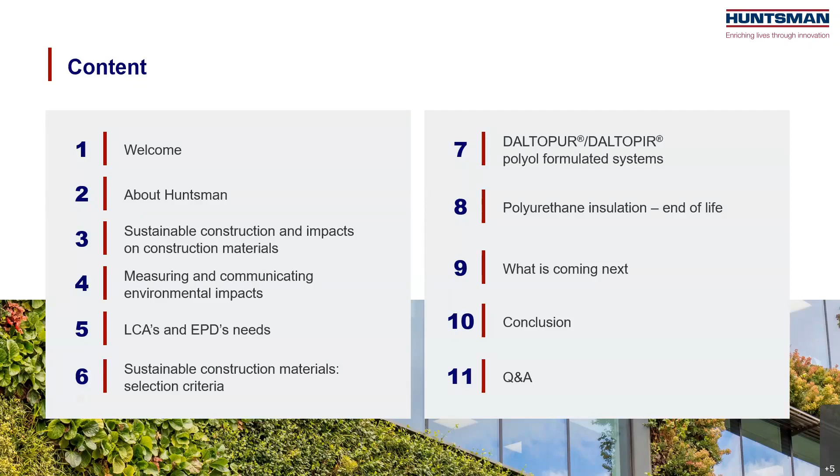So let's start with a brief introduction to Huntsman. Huntsman is an American company founded by Mr. John Huntsman about 50 years ago. Today, Huntsman Corporation is a publicly traded global manufacturer and marketer of differentiated and specialty chemicals. Our products number in thousands and are sold worldwide to manufacturers serving a broad and diverse range of consumer and industrial end markets.

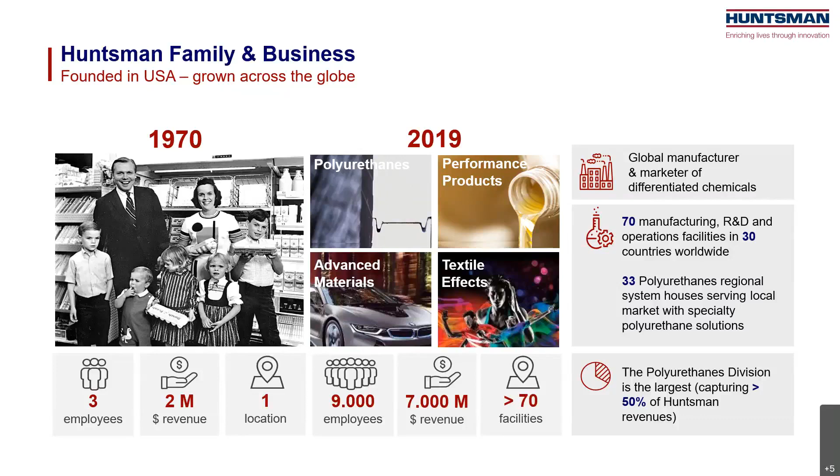ICI Polyurethane, later acquired by Huntsman, was one of the first companies to introduce the technology used to produce rigid foam more than 60 years ago. We pioneered further with the right innovative blowing agents, and the first continuous system production was implemented. In 2010, we enforced the Huntsman Sustainability Council and produced our first final annual report. In 2013, we acquired Oxid LP manufacturer, a US-based producer of proprietary bio-based and recycle-based polyols. Huntsman continued to further develop the rigid continuous business with the years, both in fire process and quality excellence.

Finally, in 2020, we started to introduce polyols with a circular content in new developments in Europe.

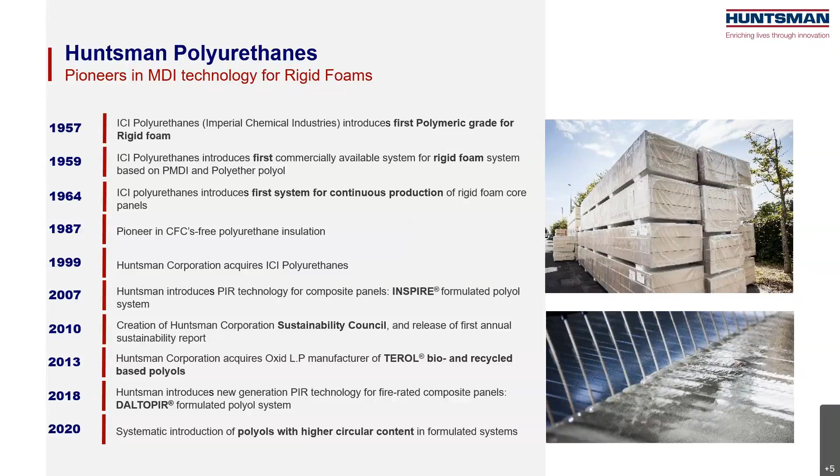The objective of our webinar today is to provide you with clear information on the sustainability construction trend and how we can support your growth in this complex environment. Sustainable construction is a fairly complex matter. With this webinar, we will give you some theory and key principles and tools used.

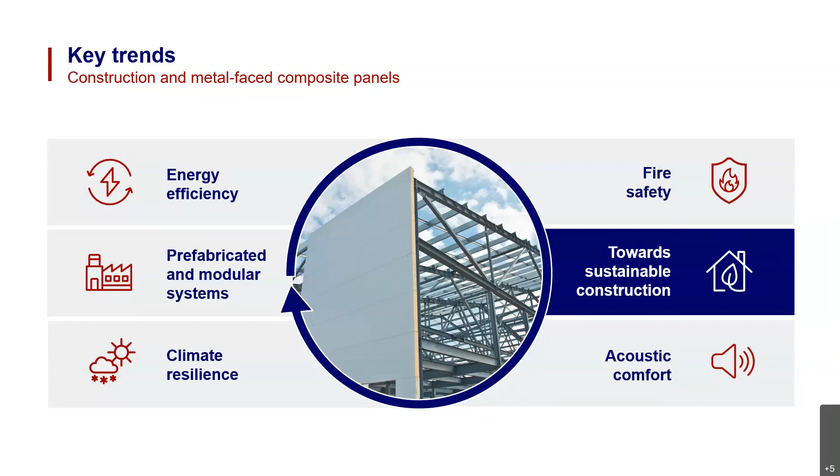In a previous webinar, we focused on energy efficiency and fire safety. This time, we will focus on a trend of increasing importance, sustainable construction.

The building sector has a great impact on the three pillars of sustainability. From an environmental perspective, construction represents 50% of the raw materials extracted and represents 40% of the energy used and the greenhouse gas emitted. With people spending 90% of their time indoors, it is important to build comfortable spaces, but also affordable ones. The construction sector is also a key driver of our economy.

Today, we will focus more specifically on the environmental pillar. What are the tools we can use to reduce the environmental impact and how polyurethane insulation is contributing.

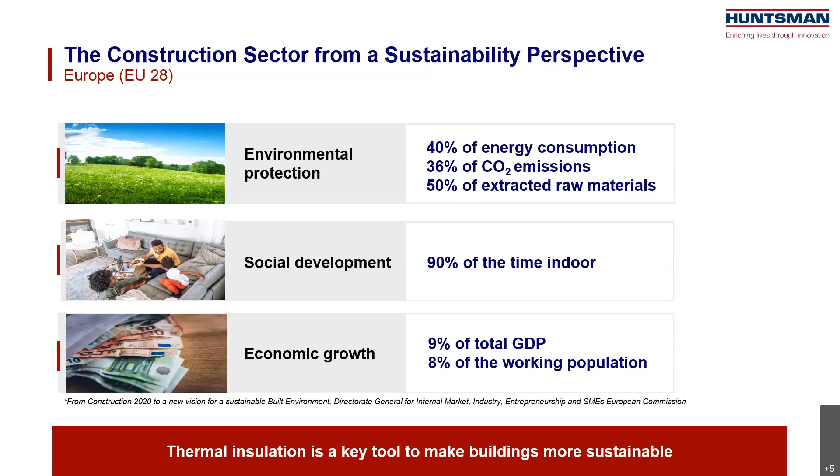With its impact on both energy consumption and CO2 emission, energy efficiency of buildings is a key milestone towards sustainable construction. We are not going to go too much into the details of the energy efficiency trend, as this was covered, as mentioned by Christophe, in more detail in a previous webinar, still accessible on our website. But let's review some of the key aspects anyway.

The whole trend started after the signature in 1997 of the Kyoto Protocol, aimed at reducing the amount of greenhouse gases emitted by human activities.

In 2002, the European Union implemented its first version of the Energy Performance Building Directive. It introduced the obligation of providing a building energy performance certificate, and the obligation for member states to impose a minimum energy performance. This directive, revised already three times, introduced very key concepts: the nearly zero energy building concept, which requires member states to define the most optimal thermal performance per climate and region, and also the obligation for all new buildings to be nearly zero energy since the beginning of this year.

With the Paris Agreement on climate change in 2015, further efforts to reduce CO2 emissions were required. As a response, with the European New Green Deal, whose ambition is for the EU to become carbon neutral by 2050, the European Union has launched a series of initiatives such as the Renovation Wave that will double the initial thermal renovation target, accompanied by adequate funding and promotion mechanisms.

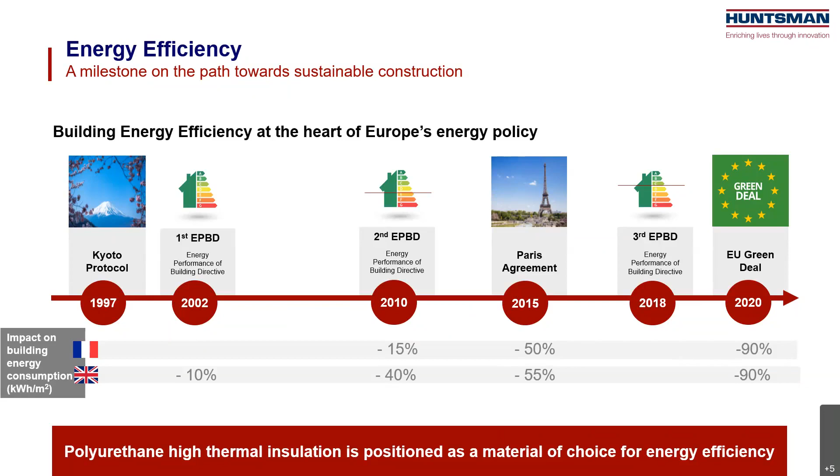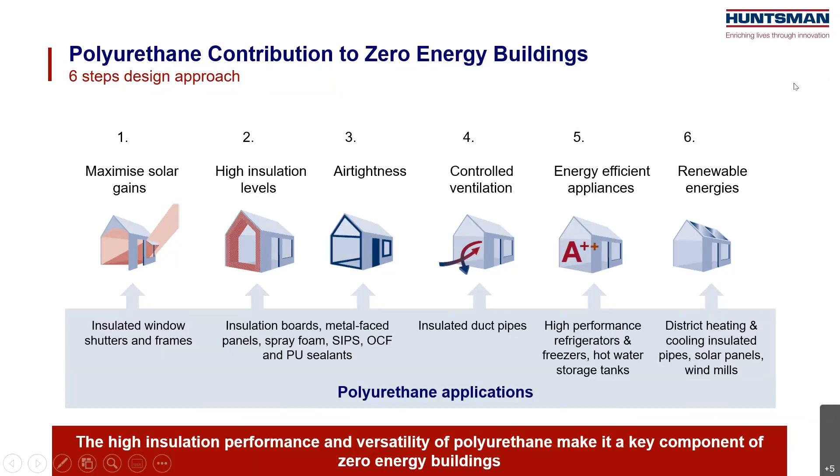Okay, thank you, Christophe. Time to get back to our presentation. As we are moving toward a drastic reduction of the building energy demand, we also start to realize how important the impact of the building material has become.

This trend is the reason why today construction material producers are pressured to provide more information on the environmental impact of their product, and why key policymakers are pushing for transformation of the whole sector by setting new policies, new standards, and incentives. These are aspects we are going to explore further today.

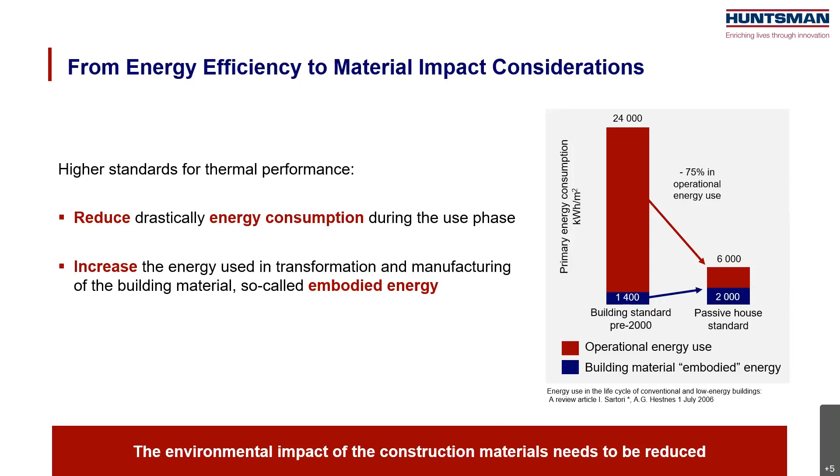But before looking at how we can reduce the contribution of building materials on the overall building environmental performance, we need to better understand how environmental performance is measured and communicated. First, let's see how the environmental impact is measured. To do so, we use a methodology called life cycle assessment, also referred to as LCA.

It is a science-based assessment that considers the environmental impact along the product life cycle, from the extraction of the raw material, their transformation, the various manufacturing processes, the transport, the use, and disposal. An LCA will give us a so-called environmental profile that will show how the product manufacturing, use, and disposal will impact different environmental compartments, such as global warming or acidification, or many others, with some examples in this slide. LCA studies provide information about the benefits and drawbacks associated with the product once decided to use.

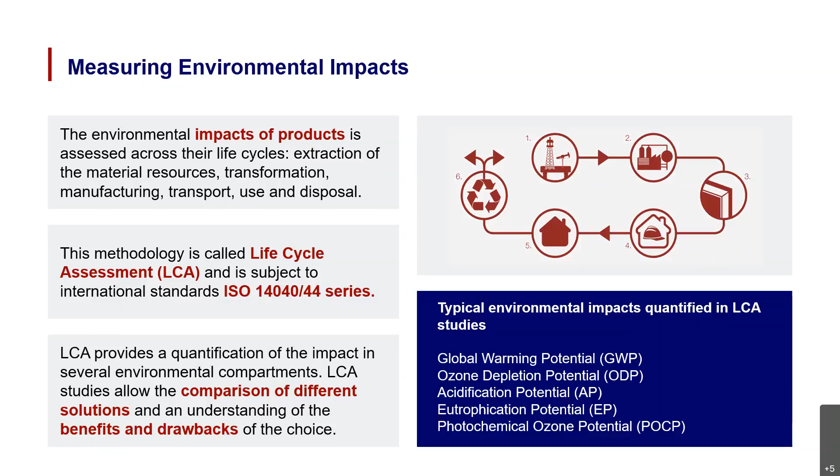When it comes to assessing the environmental impact of construction materials, the LCA International Standards make it very clear that the end-use application and all the relevant ancillaries required for the proper installation and functioning of the building element need to be considered. In the next two slides, we will show the results of two LCA studies that illustrate how PU insulation performs versus alternative insulants in specific end-use applications.

These studies were commissioned by PU Europe, the European Federation of Polyurethane Insulation Producers, and were carried out by third parties. We will show LCA graphs that may seem complex, but I will explain how to interpret them as we go along.

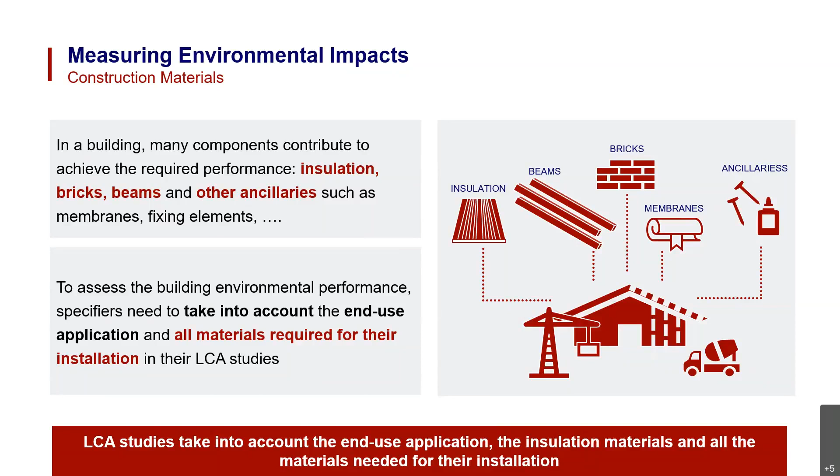In this first example, the LCA study calculated the environmental impact associated with designing a two-story single-family residential house with the same thermal performance for the envelope and the same constructed gross surface areas.

Thanks to the reduced building element thickness and reduced ancillaries for the installation of the thinner PU boards, it resulted, as shown in the graph, that compared to the alternative, stone wool insulation, both building designs have similar environmental profiles. Indeed, from an LCA perspective, differences lower than 20% are not considered significant, and that is what the green shade shows us.

During the study, we also looked at quantifying the living space area saved and found that for such a small dwelling, at least 4 square meters of valuable living space, the size of a small shower room, could be saved by using thin PU insulation layers in the building envelope. This was believed to also improve the property's rent or sales value.

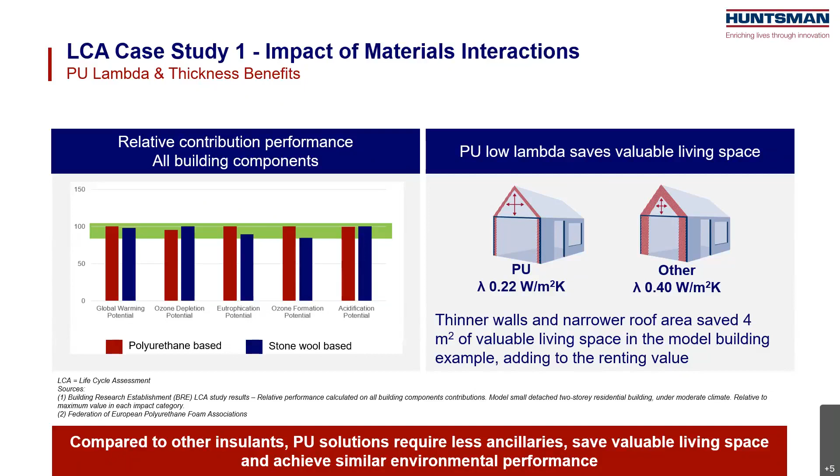In the second example, the LCA study focused on the design of a commercial building with a steel deck roof and metal-faced insulated panels in the walls. LCA showed that in most impact categories, PU performed similarly to stone wool, except that for global warming and acidification, PU performed better.

The study demonstrated that the use of PU, with its low density, translates into a much lighter roof design that required less metal support, which compensates for the intrinsic higher embedded impact of a complex material such as polyurethane. These are just two case studies, and we know that they cannot be extrapolated to all construction detailing and solutions.

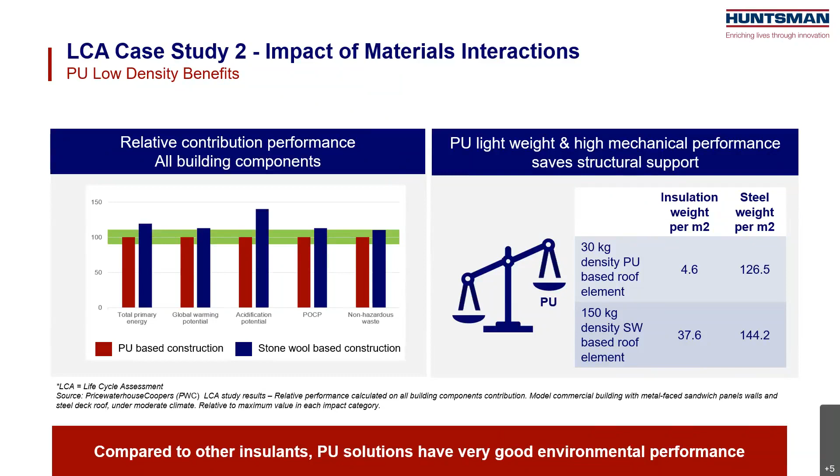What we wanted to show here is that polyurethane insulation can provide buildings with very good environmental performance, as well as very high energy efficiency.

In order to simplify the calculation of the environmental impacts of buildings and to encourage the demand of construction products that cause less stress to the environment, the construction sector has seen the development since the late 90s of what we call Environmental Product Declarations, or EPDs.

EPDs are based on LCA studies. They are third-party verified and are now based on internationally agreed standards, which define the LCA rules to follow, what we call the product category rules.

In Europe, we have two important standards to consider. EN 15804, Amendment 2, is the standard applicable to all construction materials. Based on this document, CEN/TC 88, which is the standardization committee responsible for insulation products under the construction product regulation, has developed the standard EN 16973, which is applicable to all insulation materials.

This standard is currently being updated to reflect the changes of the amendments. There are also a series of national EPD schemes that were developed prior to the European harmonization activity, and which are still very much in use today.

Most of them have aligned themselves to the European norm, although systems like those in France, Belgium, and the Netherlands impose some additional country-specific rules. Huntsman has been very active in the European standardization process and can provide you with more detailed information on the procedures to follow to do the LCAs to establish the EPDs.

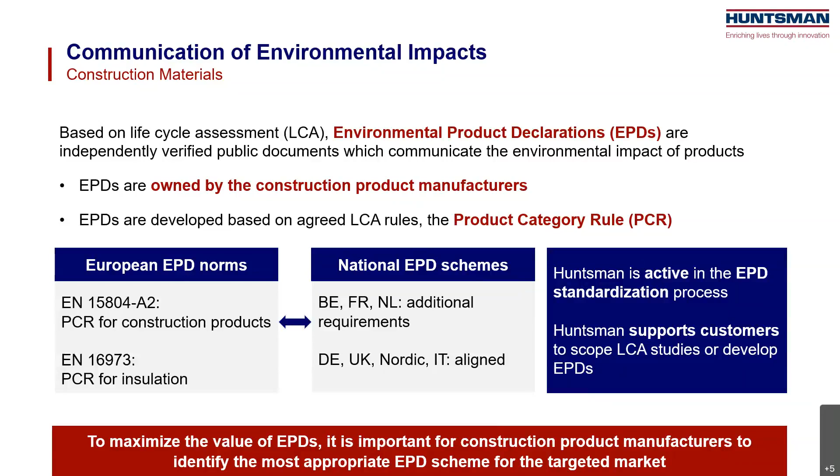Today, the use of LCA and EPDs in construction is driven by both regulatory and market incentives. For example, in the Netherlands, LCA EPD data need to be provided by the construction material producer so that the building's environmental performance can be measured and reported. Failing to do so, overestimated default values will be used that may result in disqualifying the product in the construction project.

In Italy, and soon in Sweden, green public procurement also requires EPDs of materials. In France and Belgium, when a producer wishes to make an environmental declaration in his advertisement, he also needs to provide an EPD as a supportive document.

Next to the legal obligation, there are also a series of market-driven incentives to provide EPDs. This is the case for all green building certification schemes, such as BREEAM from the UK, LEED from the US, DGNB in Germany, HQE in France, or TOTEM in Belgium, to mention only but a few.

These certification schemes are getting so popular that architects and project owners see them adding value to the property for sales. In addition, providing upfront EPDs is seen as showing the company's commitment to contribute to better environments and renders their product more attractive to potential buyers and specifiers.

EPDs can also help producers themselves optimize the environmental performance of their product offering by allowing them to make the right choices for raw materials and optimize their processes.

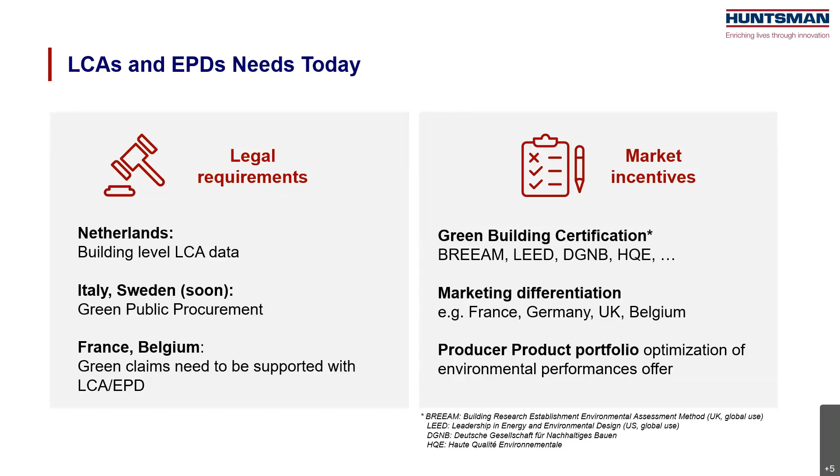Besides the requirements to provide EPDs, green building certification also rewards construction products offering additional features, so-called credits, such as having recycled or bio-based content, or the absence of blowing agents with high global warming potential, such as HFCs. There are also national schemes that impose minimum environmental criteria, such as the Italian Ecobonus tax incentive that requires a minimum of recycled content to be eligible for a tax rebate.

The BREEAM scheme also rewards products for which the chemical suppliers can demonstrate compliance to the ISO 14001 standard, which is the international standard for environmental management. Please note that our production site in Rotterdam, in the Netherlands, is certified. Our portfolio can help fulfilling the green building certification criterion and help access the relevant incentives.

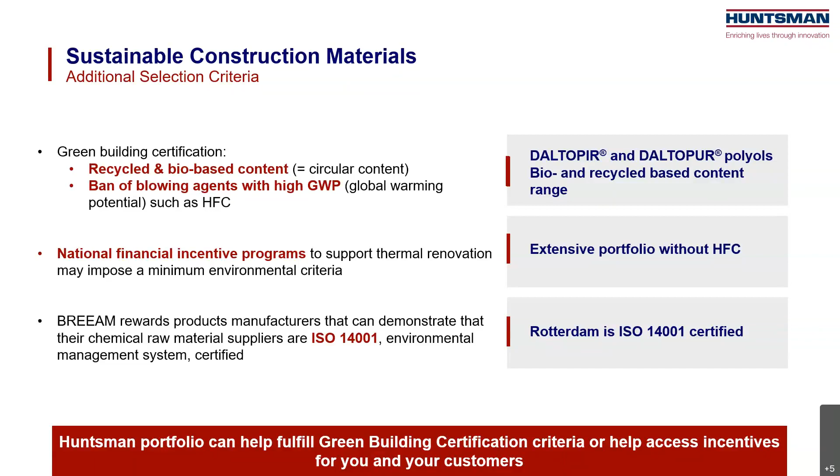As you can see, our two latest developments offer an increased circular content, either based on recycled material, like for our DALTOPIR XHFR, or based on biosourcing for the DALTOPUR NFR. And we are working on increasing this offer to respond to the increased expectation in the market.

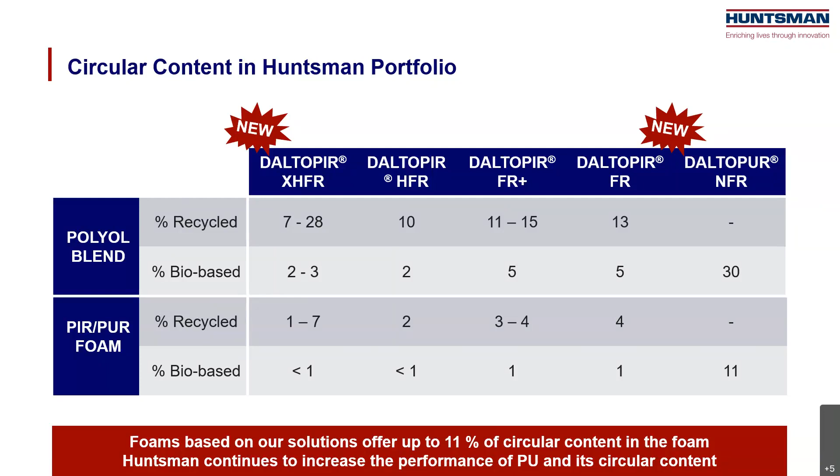Another important topic for sustainable construction, of course, is end-of-life management. Due to relatively young, widespread adoption of PU insulation for construction, mainly in the last 3 decades, and due to the long lifespan of the product, very few construction projects with PU insulation waste have reached the end of life. Therefore, large-scale reuse and recycling of PU insulation is not generally practiced at the moment.

However, both mechanical and chemical recycling technologies exist today. They need further development and cooperation along the value chain, and new concepts such as design for deconstruction, quality standards for reused material, separate collection at demolition site, and investment in recycling facilities. All these need to be worked out and further implemented.

Today, some commercially viable solutions and research programs start to flourish, engaging the key stakeholders to find a sustainable solution to further reduce the environmental impacts of building using polyurethane insulation. The list we show here is not exhaustive, and we hope to see more initiatives coming up in the near future.

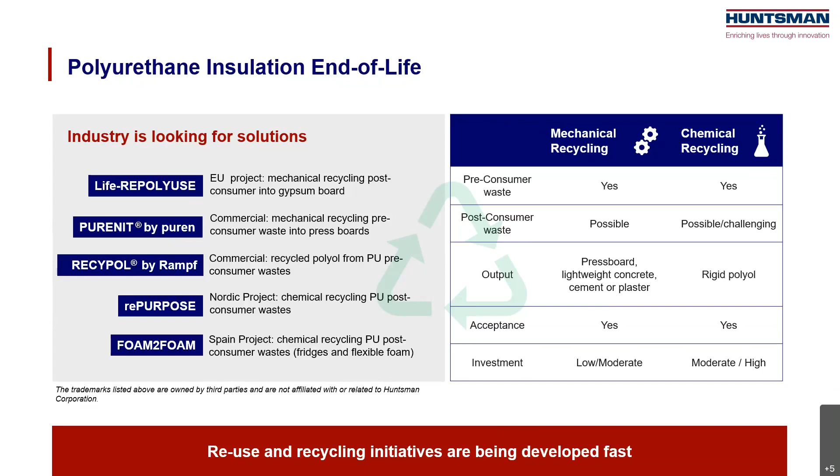Up to now, most of the sustainable construction initiatives have been based on voluntary initiatives. But this is changing quickly, driven by EU policymakers and the need to target carbon neutrality by 2050 and a circular economy. Dossiers that we need to follow closely are, first of all, the European Commission Levels Framework for Sustainable Building. This initiative, launched end of 2020, will provide a framework, indicators, and a common language for building sustainability, and will be the basis for further policy initiatives and action to include life cycle thinking and circularity in building design in Europe for the coming year.

The next important initiative to look at is the European Green Deal Sustainable Product Policy. It will seek integration of circular by design, new eco-label criteria, but also better green public procurement rules, and possibly a new way to disclose environmental performance of products.

The EU Green Deal Sustainable Built Environment Strategy is expected in spring 2021, and this will also focus on policy measures for a circular and sustainable building stock, including embodied carbon approaches. And last but not least, a possible integration of EPD-like information in the construction product CE marking declaration itself.

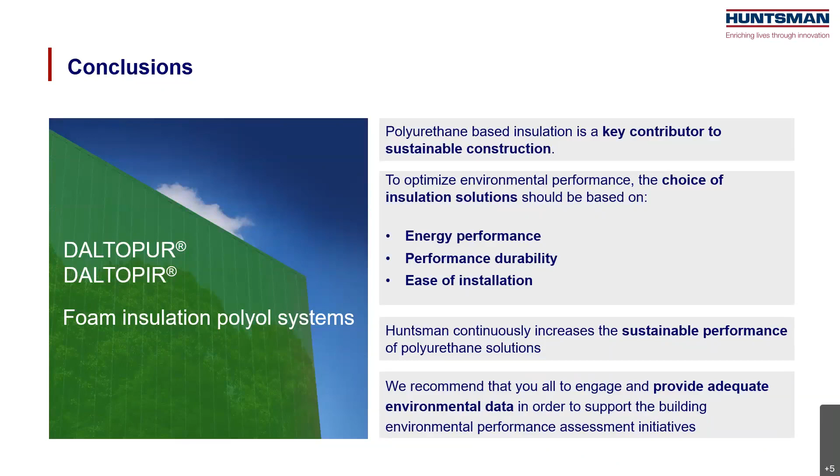Recycling of PU is a complex challenge from the technical point of view. What is your position on this topic? Will you take it?

Yeah, it's okay. So indeed, recycling of PU is complex. From a technology point of view, we do have knowledge on different routes to recycle the material. The biggest challenge, of course, is to reach the waste material itself when it comes at the end of life. What will be the quality? What will be the consistency of the flow? We do have experts in-house that can help if you have more specific questions. But this is indeed a topic that we are looking into to solve.

Can you give examples of building products using your materials that have achieved the Green Certification Award?

That's a complex one. The answer will not be that simple in the sense that we are providing raw materials for our customers to produce panels. We know that together with this material, we provide information about potential performance, like the recycled content, the bio content, the absence of high GWP blowing agents, and that we are ISO certified for our chemical production. So we believe our materials find their way into these projects, but we cannot trace them because that's up to the producer of the finished panel to track. But we are quite confident that we indeed will find our material in these certified buildings.